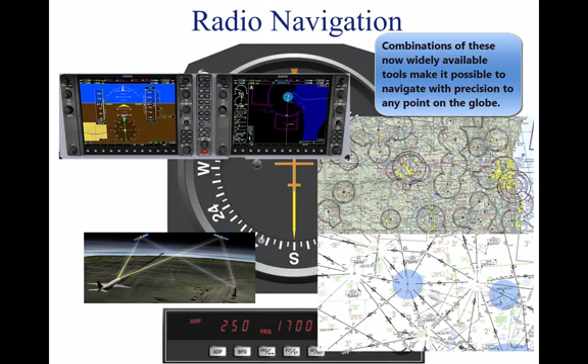Radio navigation. Advances in navigational radio receivers installed in aircraft, the development of aeronautical charts which show the exact location of ground transmitting stations and their frequencies, along with refined flight deck instrumentation, make it possible for pilots to navigate with precision to almost any point desired.

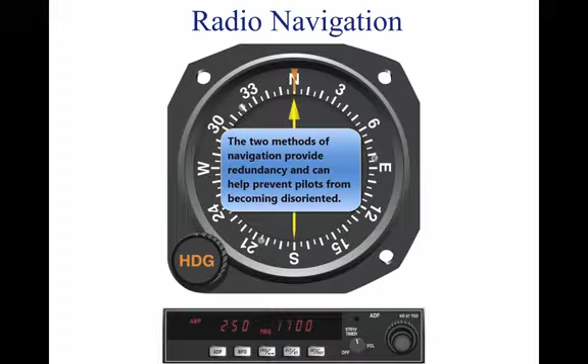Although precision in navigation is obtainable through the proper use of this equipment, beginning pilots should use this equipment to supplement navigation by visual reference to the ground, pilotage. This method provides the pilot with an effective safeguard against disorientation in the event of radio malfunction.

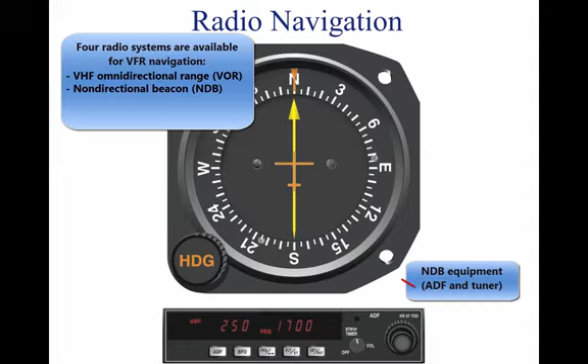There are 4 radio navigation systems available for use for VFR navigation. These are VHF Omnidirectional Range (VOR), Non-Directional Radio Beacon (NDB), Long Range Navigation (LORAN-C), and Global Positioning System (GPS).

Very High Frequency, VHF Omnidirectional Range, VOR. The VOR system is present in 3 slightly different navigation aids, NavAids: VOR, VOR-DME, and VORTAC.

By itself, it is known as a VOR, and it provides magnetic bearing information to and from the station. When DME is also installed with a VOR, the NavAid is referred to as a VOR-DME. When military tactical air navigation (TACAN) equipment is installed with a VOR, the NavAid is known as a VORTAC. DME is always an integral part of a VORTAC.

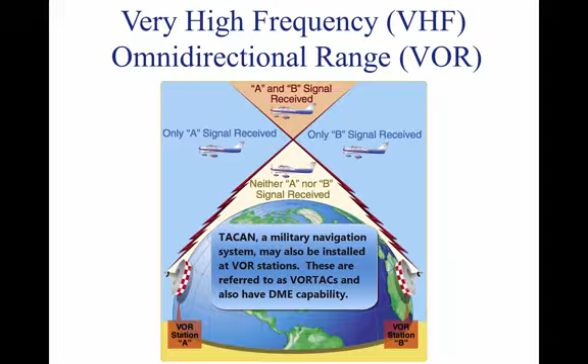Regardless of the type of NavAid utilized, VOR, VOR-DME, or VORTAC, the VOR indicator behaves the same. Unless otherwise noted, in this section, VOR, VOR-DME, and VORTAC NavAids are all referred to hereafter as VORs.

The prefix omni means all, and an omnidirectional range is a VHF radio transmitting ground station that projects straight-line courses, or radials, from the station in all directions. From a top view, it can be visualized as being similar to the spokes from the hub of a wheel.

The distance VOR radials are projected depends upon the power output of the transmitter. The course or radials projected from the station are referenced to magnetic north. Therefore, a radial is defined as a line of magnetic bearing extending outward from the VOR station.

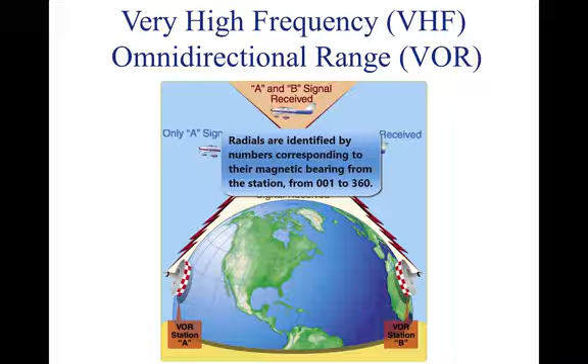Radials are identified by numbers beginning with 001, which is 1 degree east of magnetic north, and progress in sequence through all the degrees of a circle until reaching 360 degrees. To aid in orientation, a compass rose referenced to magnetic north is superimposed on aeronautical charts at the station location.

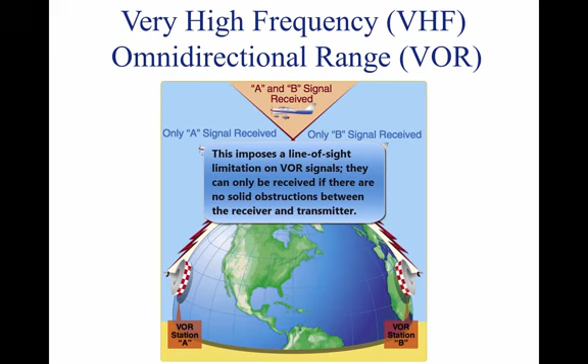VOR ground stations transmit within a VHF frequency band of 108.0 to 117.95 MHz. Because the equipment is VHF, the signals transmitted are subject to line-of-sight restrictions. Therefore, its range varies in direct proportion to the altitude of receiving equipment.

Generally, the reception range of the signals at an altitude of 1,000 feet above ground level, AGL, is about 40 to 45 miles. This distance increases with altitude.

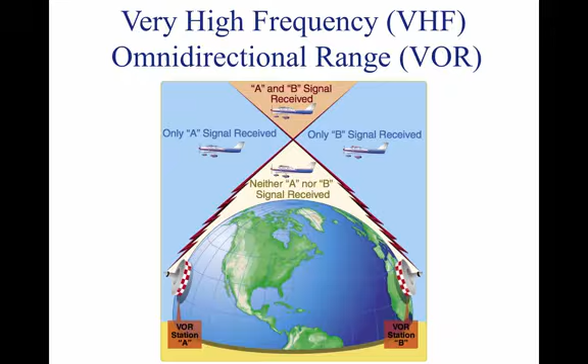The useful range of certain facilities may be less than 50 miles. For further information concerning these restrictions, refer to the Communication NavAid remarks in the AFD.

The accuracy of course alignment of VOR radials is considered to be excellent. It is generally within plus or minus 1 degree. However, certain parts of the VOR receiver equipment deteriorate, and this affects its accuracy. This is particularly true at great distances from the VOR station.

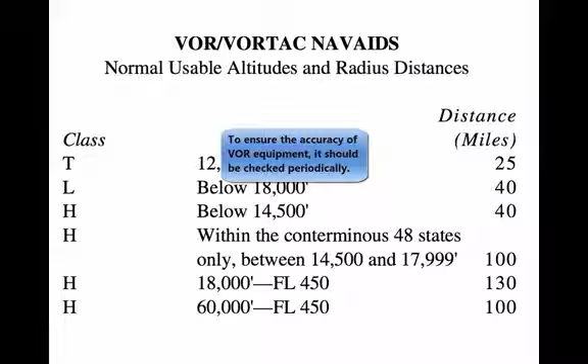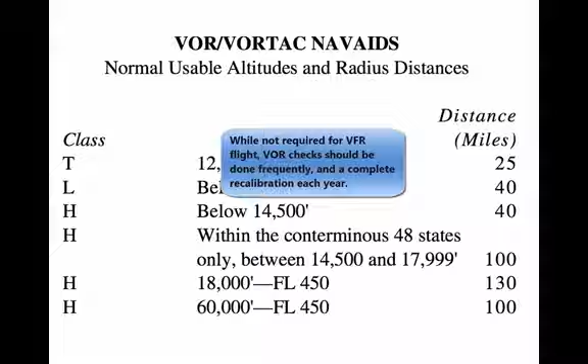The best assurance of maintaining an accurate VOR receiver is periodic checks and calibrations. VOR accuracy checks are not a regulatory requirement for VFR flight. However, to assure accuracy of the equipment, these checks should be accomplished quite frequently, with a complete calibration each year.

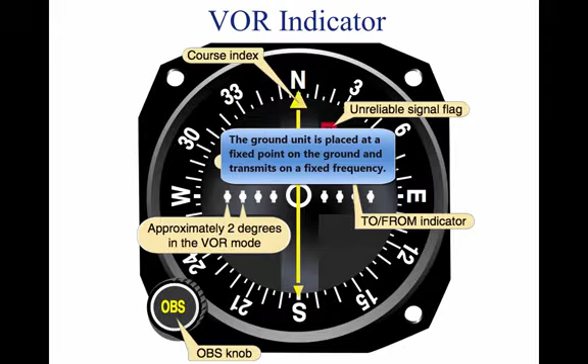Using the VOR. In review, for VOR radio navigation, there are two components required: ground transmitter and aircraft receiving equipment. The ground transmitter is located at a specific position on the ground and transmits on an assigned frequency. The aircraft equipment includes a receiver with a tuning device and a VOR or Omni navigation instrument.

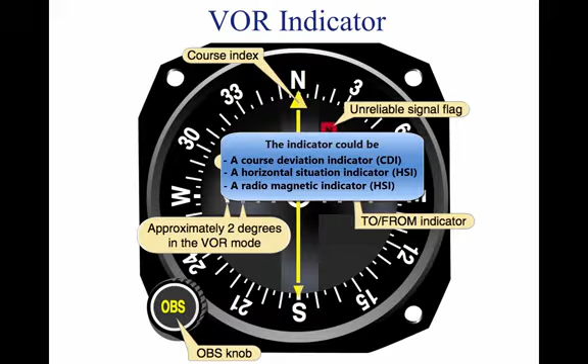The navigation instrument could be a course deviation indicator (CDI), horizontal situation indicator (HSI), or a radio magnetic indicator (RMI). Each of these instruments indicates the course to the tuned VOR.

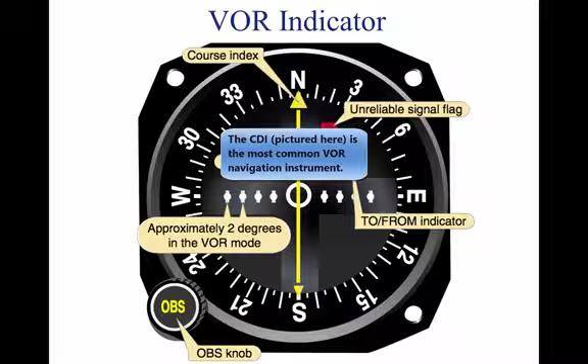Course deviation indicator. The CDI is found in most training aircraft. It consists of: 1. Omni bearing selector (OBS), sometimes referred to as the course selector. 2.

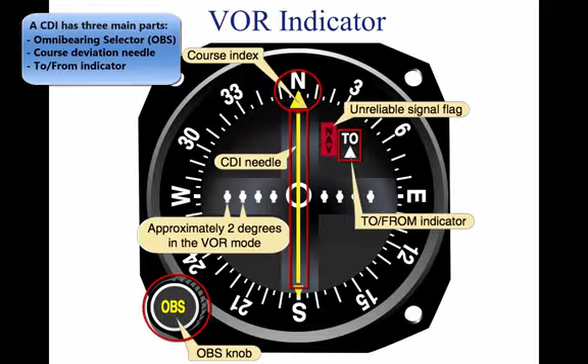A CDI needle, left-right needle, and a to-from indicator. The course selector is an azimuth dial that can be rotated to select a desired radial, or to determine the radial over which the aircraft is flying. In addition, the magnetic course to or from the station can be determined.

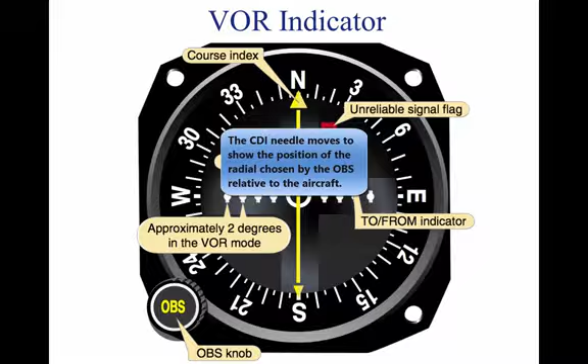When the course selector is rotated, it moves the CDI or needle to indicate the position of the radial relative to the aircraft. If the course selector is rotated until the deviation needle is centered, the radial, magnetic course from the station, or its reciprocal, magnetic course to the station, can be determined.

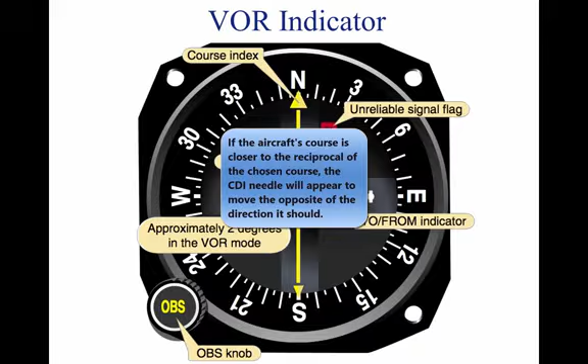The course deviation needle also moves to the right or left if the aircraft is flown or drifting away from the radial set in the course selector. By centering the needle, the course selector indicates either the course from the station or the course to the station.

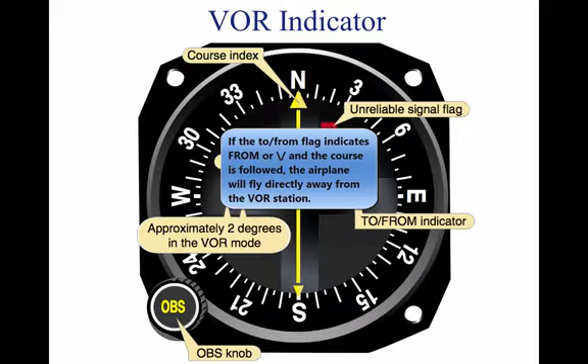If the flag displays a to, the course shown on the course selector must be flown to the station. If from is displayed and the course shown is followed, the aircraft is flown away from the station.

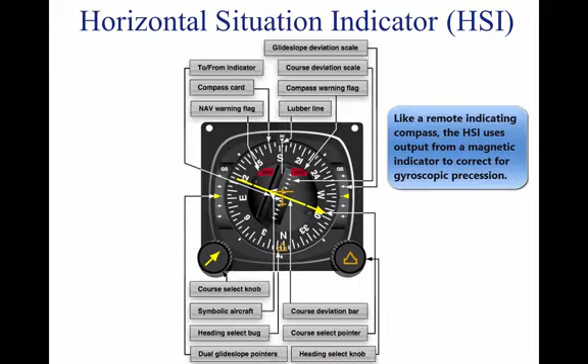Horizontal situation indicator. The HSI is a direction indicator that uses the output from a flux valve to drive the compass card. The HSI combines the magnetic compass with navigational signals and a glide slope.

The HSI gives the pilot an indication of the location of the aircraft with relationship to the chosen course or radial. In this figure, the aircraft magnetic heading displayed on the compass card under the lubber line is 184 degrees. The course select pointer shown is set to 295 degrees. The tail of the pointer indicates the reciprocal, 115 degrees.

The course deviation bar operates with a VOR, localizer, or GPS navigation receiver to indicate left or right deviations from the course selected with the course select pointer. Operating in the same manner, the angular movement of a conventional VOR loc needle indicates deviation from course.

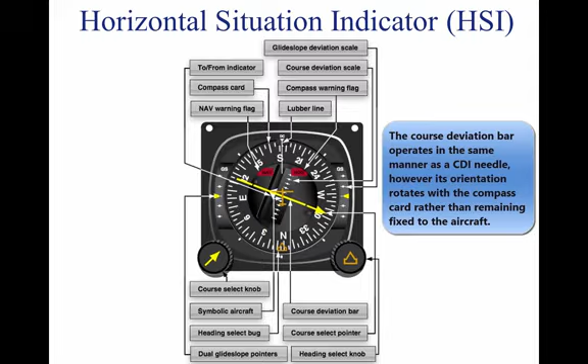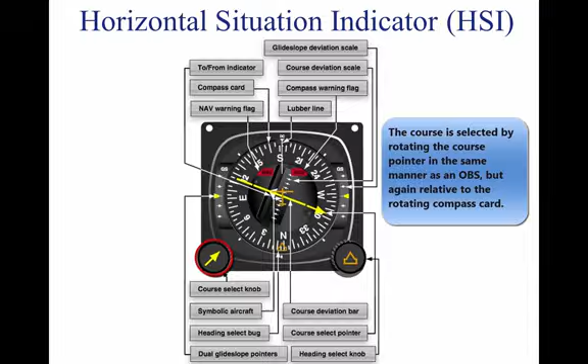The desired course is selected by rotating the course select pointer in relation to the compass card by means of the course select knob. The HSI has a fixed aircraft symbol, and the course deviation bar displays the aircraft's position relative to the selected course.

The to-from indicator is a triangular pointer. When the indicator points to the head of the course select pointer, the arrow shows the course selected. If properly intercepted and flown, the course will take the aircraft to the chosen facility.

When the indicator points to the tail of the course, the arrow shows that the course selected, if properly intercepted and flown, will take the aircraft directly away from the chosen facility.

When the nav warning flag appears, it indicates no reliable signal is being received. The appearance of the heading flag indicates the compass card is not functioning properly.

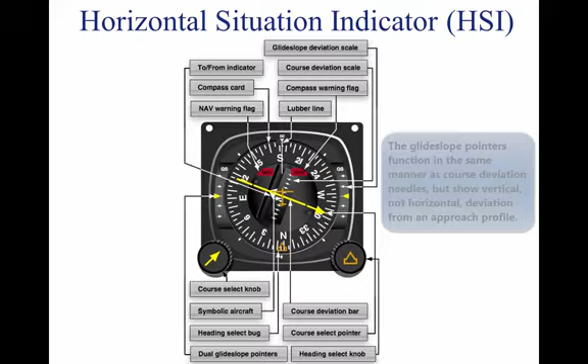The glide slope pointer indicates the relation of the aircraft to the glide slope. When the pointer is below the center position, the aircraft is above the glide slope, and an increased rate of descent is required. In some installations, the azimuth card is a remote indicating compass.

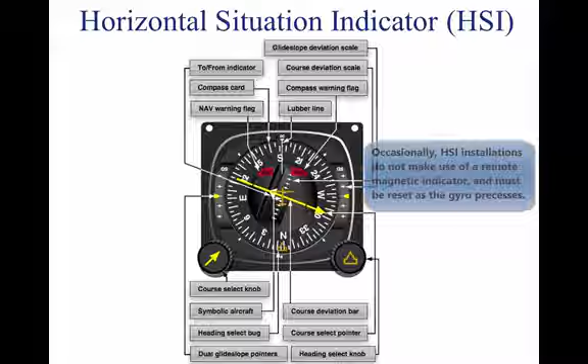However, in others, the heading must be checked occasionally against the magnetic compass and reset. The RMI is a navigational aid providing aircraft magnetic or directional gyro heading and VOR, GPS, and automatic direction finder bearing information.

Remote indicating compasses were developed to compensate for errors in and limitations of older types of heading indicators. The remote compass transmitter is a separate unit, usually mounted in a wingtip, to eliminate the possibility of magnetic interference. The RMI consists of a compass card, a heading index, 2 bearing pointers, and pointer function switches.

The 2 pointers are driven by any 2 combinations of a GPS, an ADF, and/or a VOR. The pilot has the ability to select the navigation aid to be indicated. The pointer indicates course to the selected nav aid or waypoint.

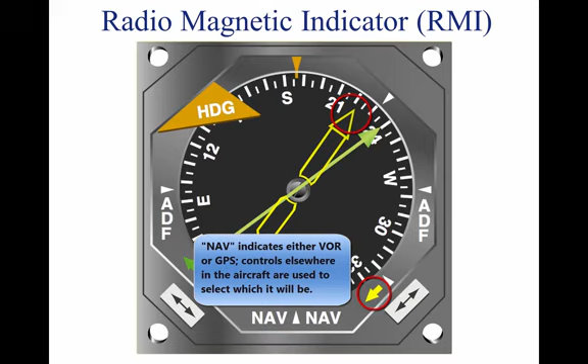In this figure, the green pointer is indicating the station tuned on the ADF. The yellow pointer is indicating the course to a VOR or GPS waypoint. Note that there is no requirement for a pilot to select course with the RMI, only the nav aid to be indicated.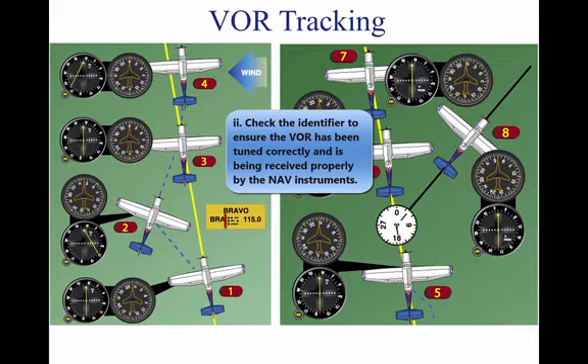First, tune the VOR receiver to the frequency of the selected VOR station, for example 115.0 to receive Bravo VOR. Next, check the identifiers to verify that the desired VOR is being received. As soon as the VOR is properly tuned, the course deviation needle deflects either left or right.

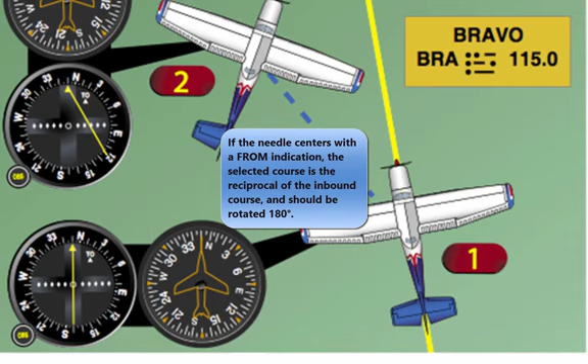Then rotate the azimuth dial or course selector until the course deviation needle centers and the to-from indicator indicates to. If the needle centers with a from indication, the azimuth should be rotated 180 degrees, because in this case it is desired to fly to the station.

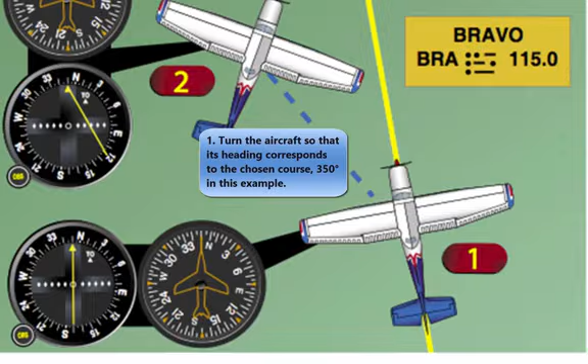Now turn the aircraft to the heading indicated on the VOR azimuth dial or course selector, 350 degrees in this example. If a heading of 350 degrees is maintained, with a wind from the right as shown, the aircraft drifts to the left of the intended track.

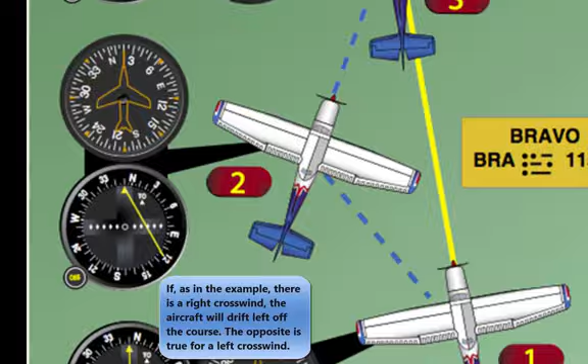As the aircraft drifts off course, the VOR course deviation needle gradually moves to the right of center, indicating the direction of the desired radial or track.

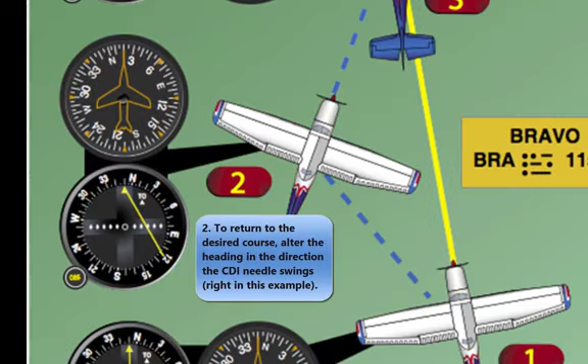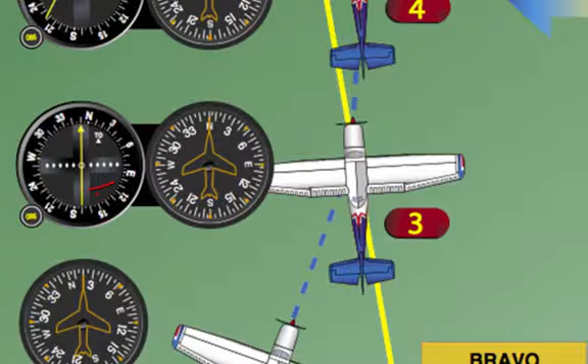To return to the desired radial, the aircraft heading must be altered to the right. As the aircraft returns to the desired track, the deviation needle slowly returns to center. When centered, the aircraft is on the desired radial, and a left turn must be made toward, but not to, the original heading of 350 degrees, because a wind drift correction must be established.

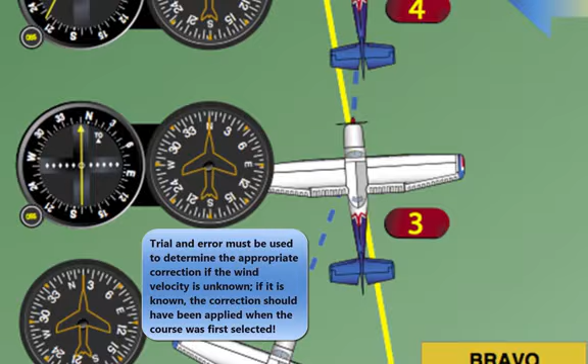The amount of correction depends upon the strength of the wind. If the wind velocity is unknown, a trial and error method can be used to find the correct heading. Assume for this example a 10-degree correction for a heading of 350 degrees is maintained.

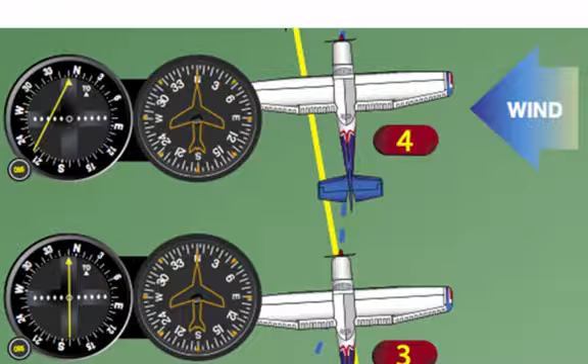While maintaining a heading of 350 degrees, assume that the course deviation begins to move to the left. This means that the wind correction of 10 degrees is too great, and the aircraft is flying to the right of course. A slight turn to the left should be made to permit the aircraft to return to the desired radial.

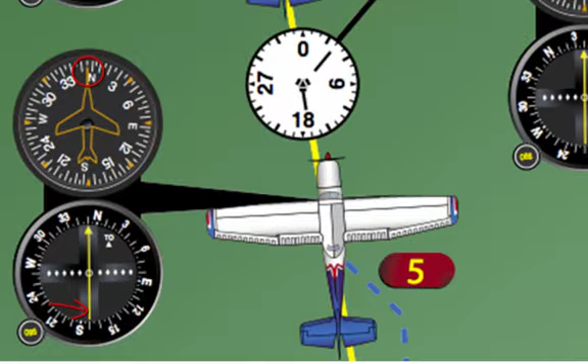When the deviation needle centers, a small wind drift correction of 5 degrees, or a heading correction of 355 degrees, should be flown. If this correction is adequate, the aircraft remains on the radial. If not, small variations in heading should be made to keep the needle centered and consequently keep the aircraft on the radial.

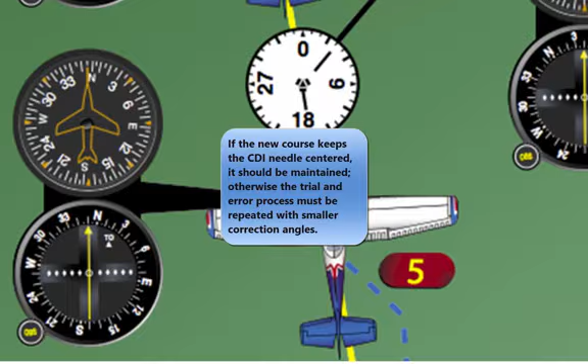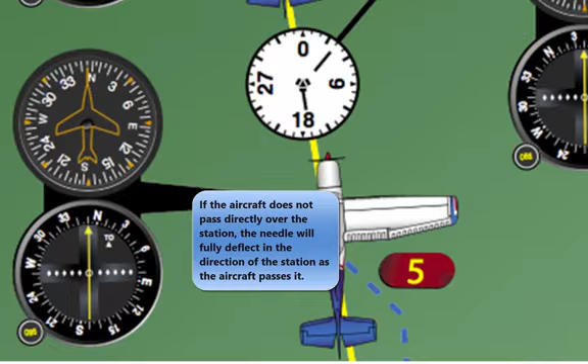As the VOR station is passed, the course deviation needle fluctuates, then settles down, and the to indication changes to from. If the aircraft passes to one side of the station, the needle deflects in the direction of the station as the indicator changes to from.

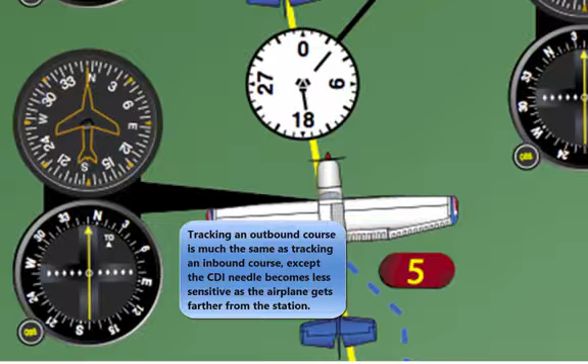Generally, the same techniques apply when tracking outbound as those used for tracking inbound. If the intent is to fly over the station and track outbound on the reciprocal of the inbound radial, the course selector should not be changed. Corrections are made in the same manner to keep the needle centered. The only difference is that the omnidirectional range indicator indicates from.

If tracking outbound on a course other than the reciprocal of the inbound radial, this new course or radial must be set in the course selector and a turn made to intercept this course. After this course is reached, tracking procedures are the same as previously discussed.

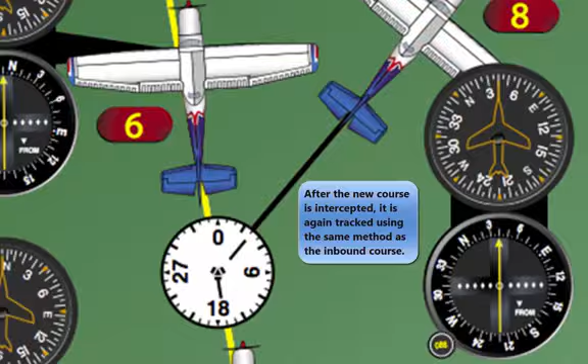Tips on using the VOR. Positively identify the station by its code or voice identification.

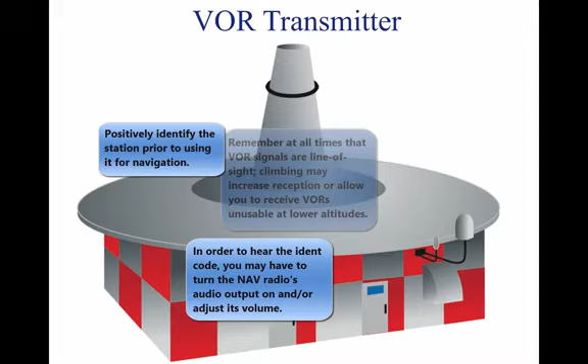Keep in mind that VOR signals are line of sight. A weak signal or no signal at all is received if the aircraft is too low or too far from the station. When navigating to a station, determine the inbound radial and use this radial.

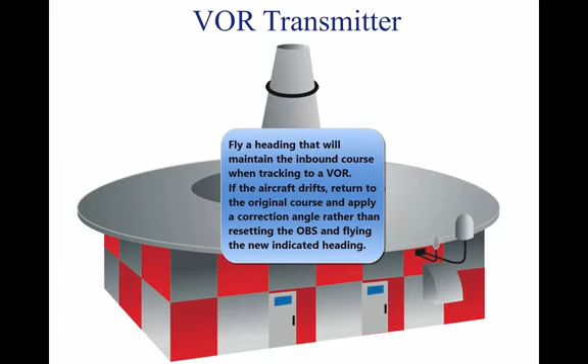Fly a heading that will maintain the course. If the aircraft drifts, fly a heading to re-intercept the course, then apply a correction to compensate for wind drift. If minor needle fluctuations occur, avoid changing headings immediately. Wait momentarily to see if the needle recenters. If it does not, then correct.

When flying to a station, always fly the selected course with a to indication. When flying from a station, always fly the selected course with a from indication.

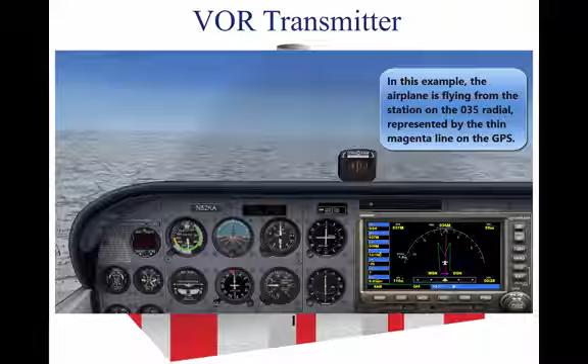If this is not done, the action of the course deviation needle is reversed. To further explain this reverse action: if the aircraft is flown toward the station with a FROM indication, or away from the station with a TO indication, the course deviation needle indicates in a direction opposite to that which it should indicate. For example, if the aircraft drifts to the right of a radial being flown, the needle moves to the right, or points away from the radial. If the aircraft drifts to the left of the radial being flown, the needle moves left, or in the direction opposite to the radial.

When navigating using the VOR, it is important to fly headings that maintain or re-intercept the course. Just turning toward the needle will cause overshooting the radial and flying an S-turn to the left and right of course.

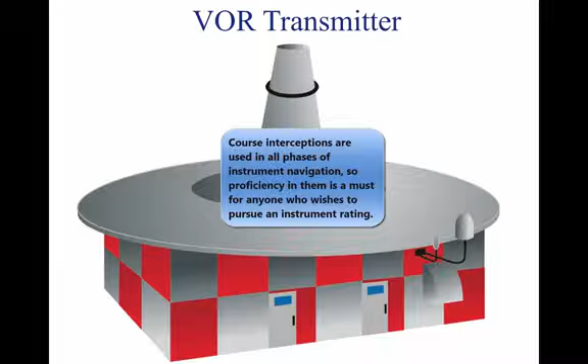Course intercept: course interceptions are performed in most phases of instrument navigation. The equipment used varies, but an intercept heading must be flown that results in an angle or rate of intercept sufficient to solve a particular problem.

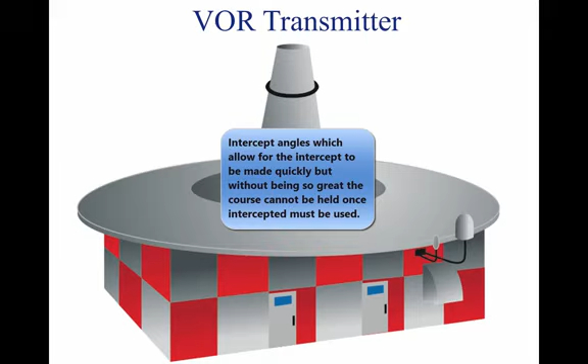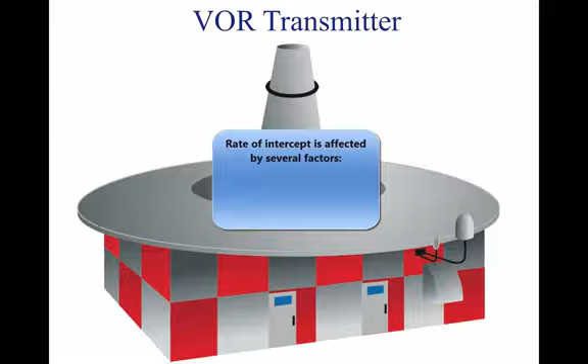Rate of intercept, seen by the aviator as bearing pointer or HSI movement, is a result of the following factors: the angle at which the aircraft is flown toward a desired course (angle of intercept), true airspeed and wind, and distance from the station.

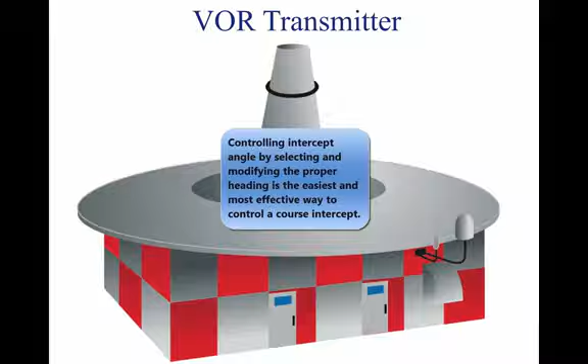Angle of intercept is the angle between the heading of the aircraft (intercept heading) and desired course. Controlling this angle by selection or adjustment of the intercept heading is the easiest and most effective way to control course interceptions. Angle of intercept must be greater than the degrees from course, but should not exceed 90 degrees. Within this limit, adjust to achieve the most desirable rate of intercept.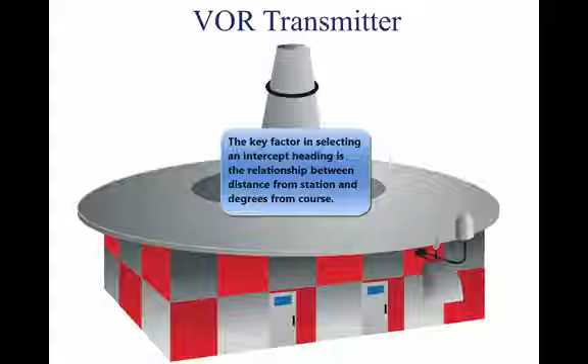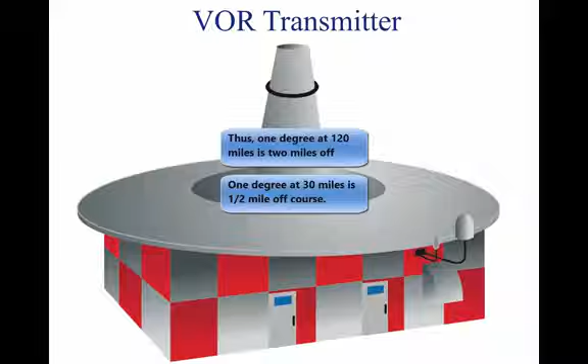When selecting an intercept heading, the key factor is the relationship between distance from the station and degrees from the course. Each degree of radial is 1 nautical mile wide at a distance of 60 nautical miles from the station. Width increases or decreases in proportion to the 60 nautical mile distance. For example, 1 degree is 2 nautical miles wide at 120 nautical miles, and 1/2 nautical mile wide at 30 nautical miles. For a given ground speed and angle of intercept, the resultant rate of intercept varies according to the distance from the station.

When selecting an intercept heading to form an angle of intercept, consider the following factors: degrees from course, distance from the station, and true airspeed and wind.

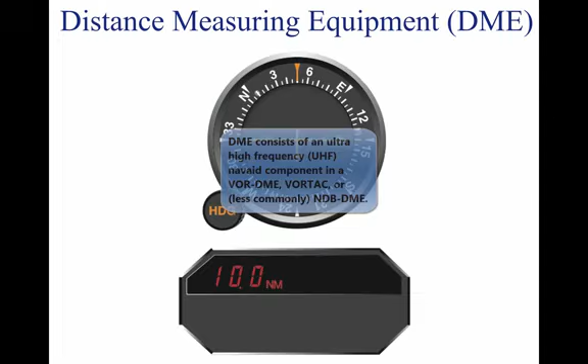Distance measuring equipment, DME, consists of an ultra-high-frequency navigational aid with VOR DMEs and VORTACs. It measures in nautical miles the slant range distance of an aircraft from a VOR DME or VORTAC, both hereafter referred to as a VORTAC. Although DME equipment is very popular, not all aircraft are DME equipped. To utilize DME, the pilot should select, tune, and identify a VORTAC as previously described.

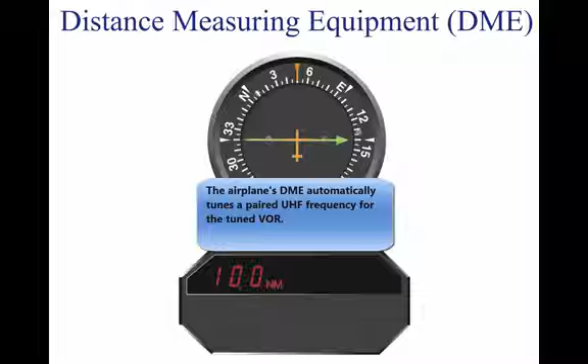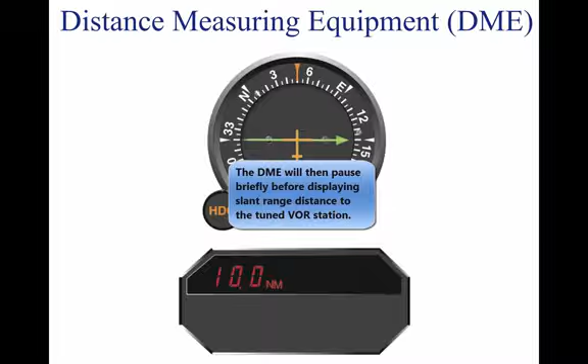The DME receiver, utilizing what is called a paired frequency concept, automatically selects and tunes the UHF DME frequency associated with the VHF VORTAC frequency selected by the pilot. This process is entirely transparent to the pilot. After a brief pause, the DME display shows the slant range distance to or from the VORTAC.

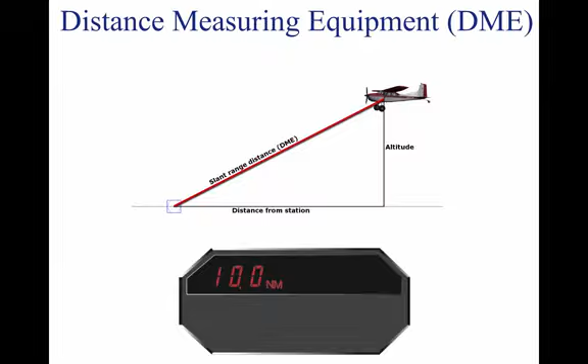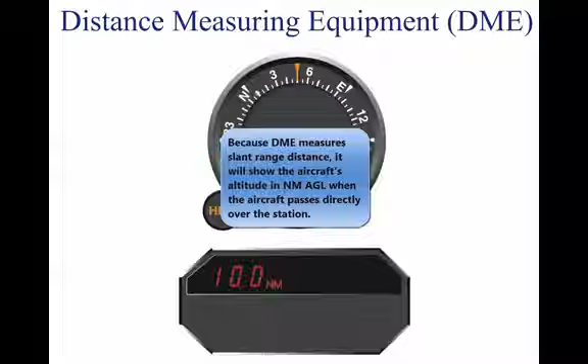Slant range distance is the direct distance between the aircraft and the VORTAC, and is therefore affected by aircraft altitude. Station passage directly over a VORTAC from an altitude of 6,076 feet above ground level (AGL) would show approximately 1.0 nautical miles on the DME.

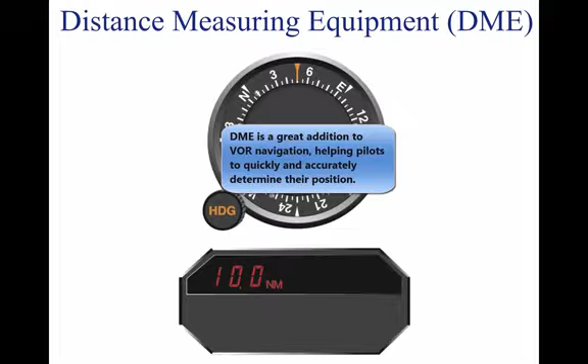DME is a very useful adjunct to VOR navigation. A VOR radial alone merely gives line of position information. With a DME, a pilot may precisely locate the aircraft on that line or radial.

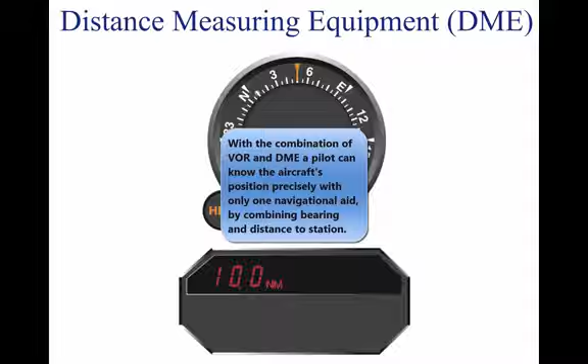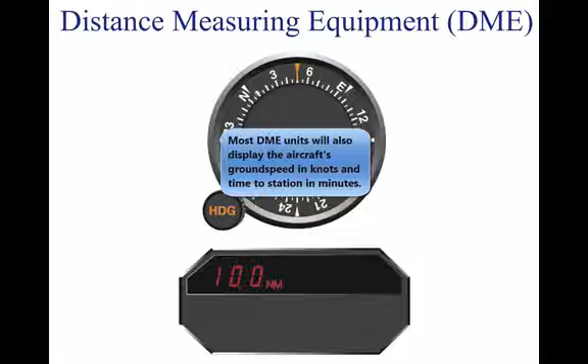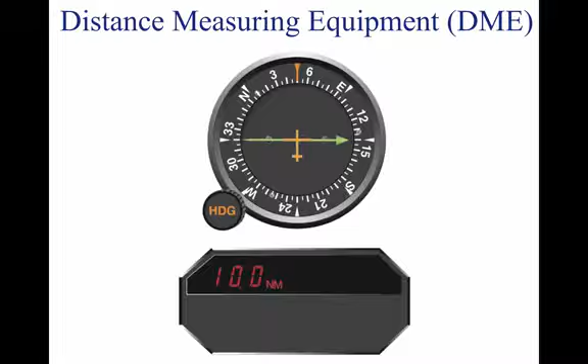Most DME receivers also provide ground speed and time-to-station modes of operation. The ground speed is displayed in knots (NMPH). The time-to-station mode displays the minutes remaining to VORTAC station passage, predicated upon the present ground speed. Ground speed and time-to-station information is only accurate when tracking directly to or from a VORTAC. DME receivers typically need a minute or two of stabilized flight directly to or from a VORTAC before displaying accurate ground speed or time-to-station information.